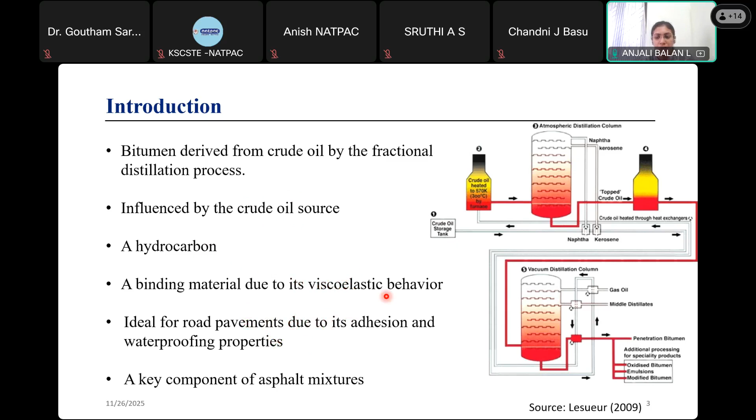And we all know that bitumen is a key component or a major constituent of an asphalt mixture. So now we know that there has been an increase in road construction in India, and India has the second largest road network in the world, right?

So we know that bitumen consumption has widely increased in India. It is said that overall around 8.8 million metric tons has been reached. The bitumen consumption has reached around 8.8 million metric tons, and it is estimated that by 2024-25, it will reach around 10 million metric tons. So there is a huge demand for bitumen. Now we have to think about an alternative material which will replace bitumen in a better way - it should be performing similar to bitumen, or it should be performing better than bitumen. So now we are in that thought process to identify a particular alternative material.

Along with that, we know that there are certain challenges for bitumen, right? Coming to the challenges of bitumen, we know that bitumen is not able to perform better under heavy conditions or heavy traffic conditions, and bitumen emits a high amount of carbon dioxide, right?

The greenhouse gas emissions are higher in the case of bitumen, and since there is an increase in bitumen demand, they are not able to find good quality bitumen. There is also resource depletion and other environmental concerns related to bitumen. So overall, there are certain challenges in using bitumen, basically coming to environmental concerns.

Okay, so we were discussing bio-bitumen now. Why do we require bio-bitumen now? What are the properties of this bio-bitumen? So coming to the properties of bio-bitumen.

If we are using any kind of bio-based material, its properties will be similar to that of petroleum asphalt or a conventional binder. This kind of bio-based material primarily consists of the chemical fractions present in conventional bitumen.

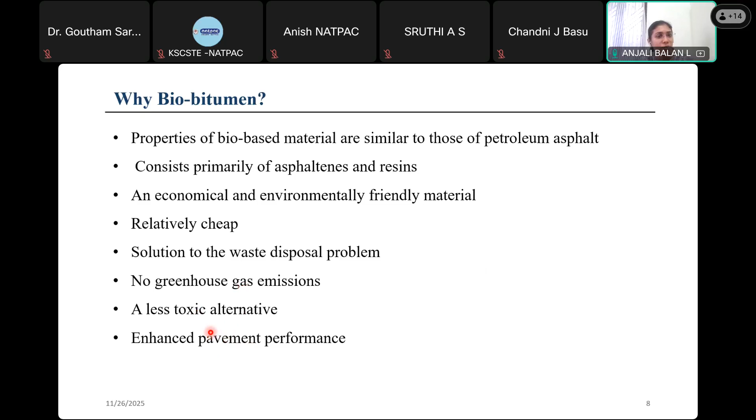Other than these properties, it is a very economical and environmentally friendly material, relatively very cheap, and it can be a solution to the waste disposal problem. We can reduce the emission of greenhouse gases, and all these environmental concerns can be solved. Also, it will be able to improve pavement performance—that is a major highlight of using bio-bitumen.

Coming to the performance of bio-bitumen, various researches have been conducted on it. From those results, we came to understand that it shows better anti-aging property. We know aging is a major issue with pavements; we have short-term aging as well as long-term aging.

With the use of this bio-bitumen, we are able to have an aging resistant material. It has also improved the high and low temperature performance, enhanced the fatigue resistance, and lowered the high temperature stability issue. All these performance aspects were enhanced with the help of bio-bitumen.

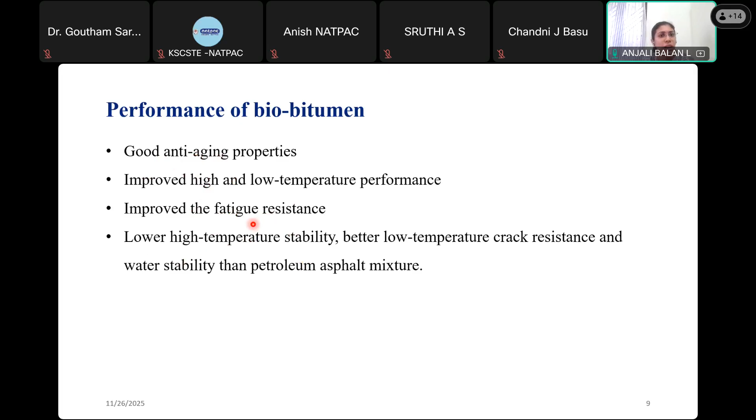For your reference, I'd like to mention that India has recently launched a bio-bitumen project for a Sustainable National Highway—NH 44 in Nagpur. There they used bio-bitumen for pavement construction. The bio-based material used was lignin, which is obtained as a waste product from the paper pulp industry. They used this lignin in bitumen and constructed a 1 kilometer road stretch with bio-bitumen.

So now we understood there is bio-bitumen. So how can this bio-bitumen be obtained?

We have already discussed that bio-bitumen is obtained from a raw material, which is biomass. So what is biomass? Biomass is basically obtained from plants, animals, and certain industrial waste.

We know that bio-waste is a major environmental concern which we are facing now. So depending upon the type of biomass, the properties of this bio-bitumen will vary.

Again, depending upon the type or the process through which we obtain the bio-based material, it will also differ in the performance of that particular bio-based material.

We have discussed the commonly used biomass which have been used for the bio-bitumen. So these are the different biomass sources which have been used for the bio-bitumen.

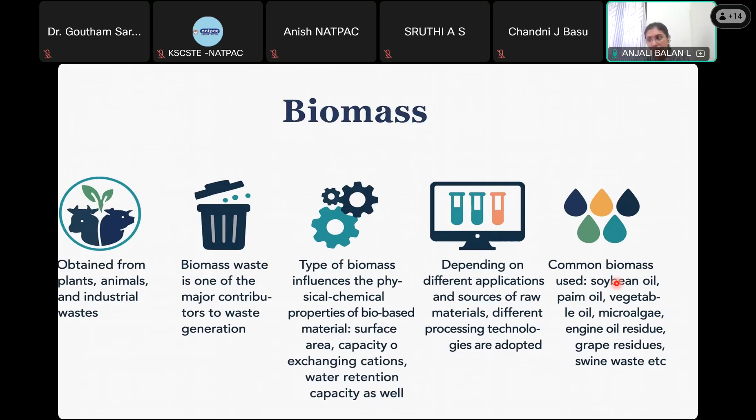Now in this study, we have used the algae biomass. So why have we used the algae biomass? It has a rapid growth rate. That is the one major reason.

Another reason is that it has a high oil content, where this oil content will help the binder to soften it or to reduce the viscosity of the binder, and also it contains proteins and carbohydrates.

Other environmental reasons include that it is a biodegradable material, and it is a very environmentally friendly material.

There is no competition with other types of crops, and it will also help to reduce the carbon footprint. So these are the major reasons for selecting the algae biomass.

Now coming to the production process, we have chosen the algae biomass as a source or raw material, and now we have to get the bio-oil or biochar from it. There are different types of production processes for obtaining this bio-based material, both biochar and bio-oil.

Depending upon the type of application and the source of the materials, the technology or process will be different. Basically the biomass is subjected to a thermochemical conversion process where we use certain heat to transform this biomass.

This transforms the biomass into major products like bio-oil as well as biochar. This thermal conversion process includes processes like combustion, gasification, and pyrolysis.

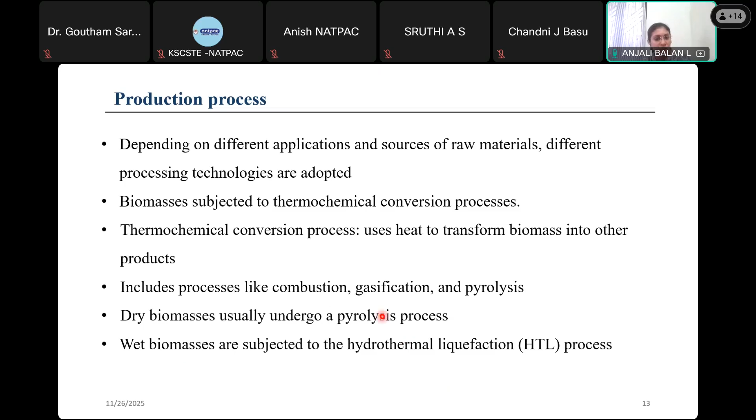If it is a wet biomass, we go for the hydrothermal liquefaction process. So in our study, we have used a pyrolysis process. This is the overall production process where the thermochemical conversion process includes gasification, pyrolysis, and the hydrothermal process.

So within the pyrolysis, we will be getting the biochar as well as the bio-oil, and within the hydrothermal process, we will be able to get the bio-oil. So this is the overall production process for the biomass.

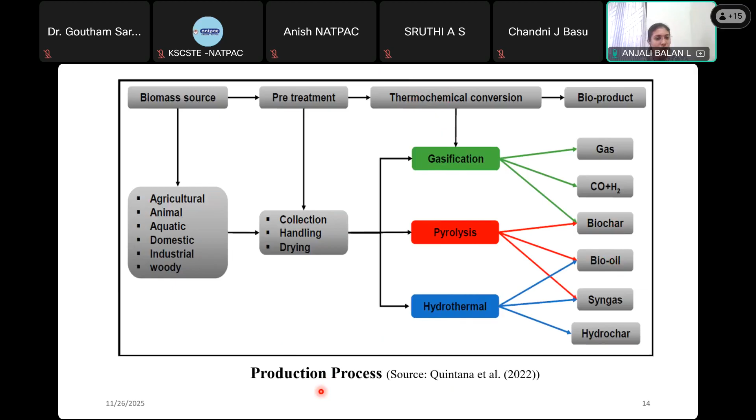Now coming to pyrolysis, as you all know, what is pyrolysis? It will convert the biomass to bio-oil, biochar, and non-condensable gases. It is done under the absence of oxygen at a higher temperature, which is between 450 to 550 degrees Celsius.

Using the pyrolysis process, we will be able to get a high bio-oil content. That is a major advantage with pyrolysis. Again, pyrolysis can be divided into slow pyrolysis, fast pyrolysis, and flash pyrolysis.

Coming to slow pyrolysis, here we have a slow heating rate as well as a long residence time, where we will be subjecting this biomass for a certain period of time.

In slow pyrolysis, we have a long residence time, and the amount of product which we get from the slow pyrolysis will be less than 50% of the weight of the initial biomass.

But in the case of fast pyrolysis, we will be having a high heating rate, and it will be a short residence time. The amount of product which we get from here will be higher when compared to slow pyrolysis.

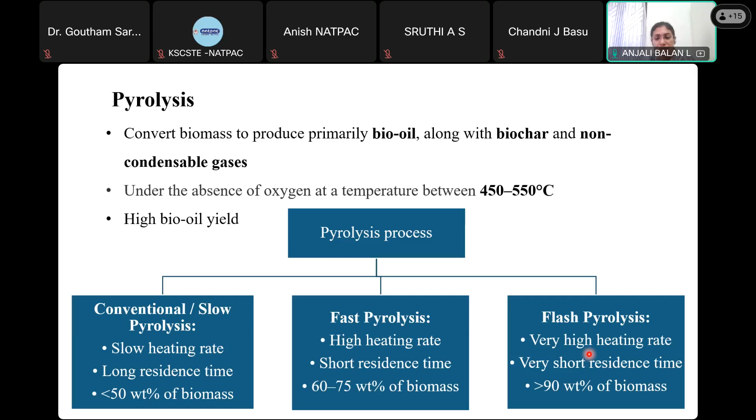Now coming to flash pyrolysis, where the heating rate will be very high compared to fast pyrolysis, and it will be having a very short residence time. The bio product which we will be getting will be greater than 90% of the initial biomass.

So coming to the pyrolysis process, how we have done the pyrolysis is: first we have the biomass, whatever the biomass source is. First we will dry it, to be less than 10% moisture, and we will be grinding it into smaller particle size.

Once that is done, we will heat it between 450 to 550 degrees Celsius, and we will get the biochar from heat. Along with that, hot pyrolysis vapors will be formed, and these will be condensed so that we get the bio-oil from there.

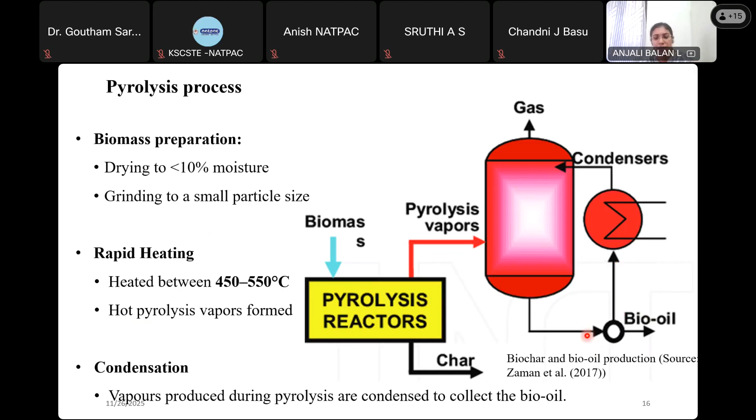So from the fast pyrolysis or pyrolysis process, we get the bio-oil as well as the biochar. So at what conditions, or what amount of biochar will we be getting? From pyrolysis, we get around 15 to 25% biochar.

And from this, we will be getting around 10 to 20% biogas, and 50 to 75% bio-oil will be obtained using the pyrolysis process.

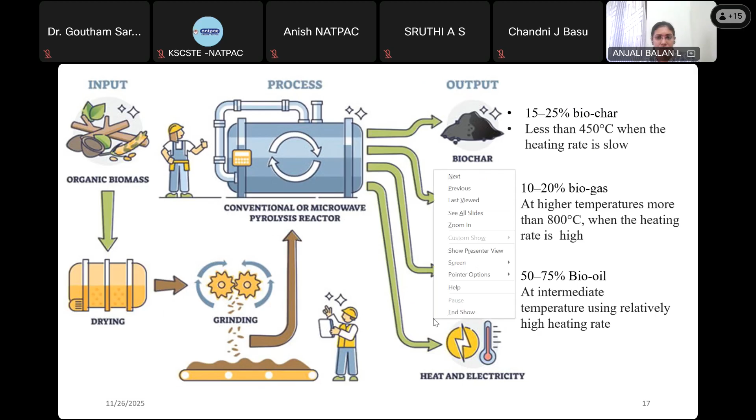So now coming to the biochar, which is a major product from the pyrolysis process.

It is a stable and rich carbon material, and it basically consists of nitrogen, hydrogen, inorganic elements, and some traces of heavy metals. It is also a porous material with a large surface area.

These are the properties of biochar, and it is highly resistant to biological and chemical deterioration. The chemical composition of biochar depends on the process adopted.

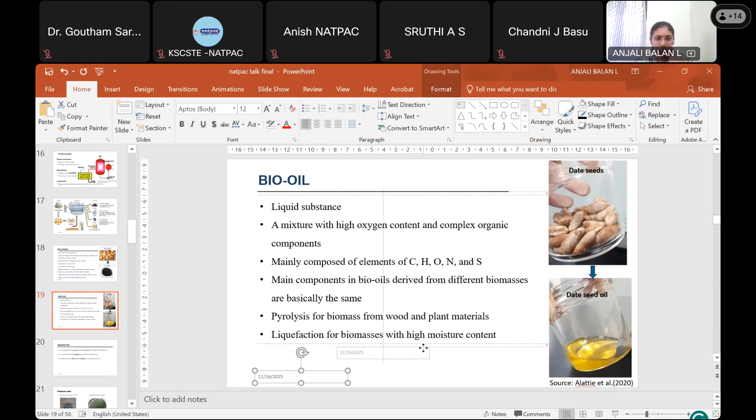So now coming to the bio-oil, which is a liquid substance obtained from the pyrolysis process. It is a mixture with a high oxygen content, and some organic compounds are present in it. It basically consists of carbon, hydrogen, oxygen, nitrogen, and sulfur.

So the major components, if the bio-oil is derived from different biomasses, are found to be almost the same. There is not much difference between the components in the bio-oil. That's what the research says.

So basically, we go for pyrolysis for biomass from wood and plant materials. If the biomass source is wood and plant materials, we go for pyrolysis. If it is biomass with high moisture content, we go for the hydrothermal liquefaction process.

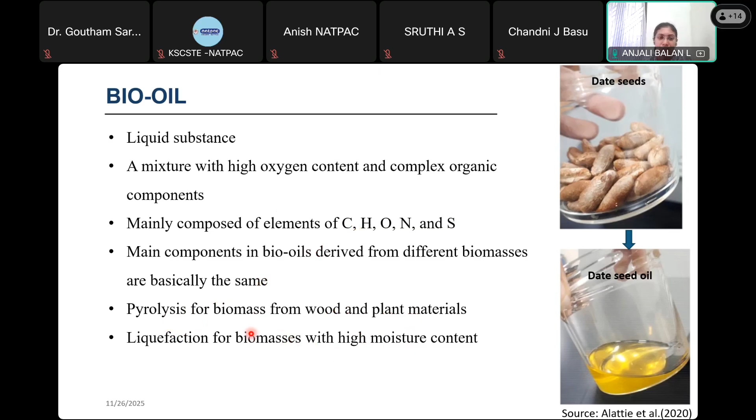So the materials which we used in our study were VG30 and spirulina species algae. In our study, we used algae biomass. Within algae, there are different types of species available, and within the different species, we selected the spirulina species algae.

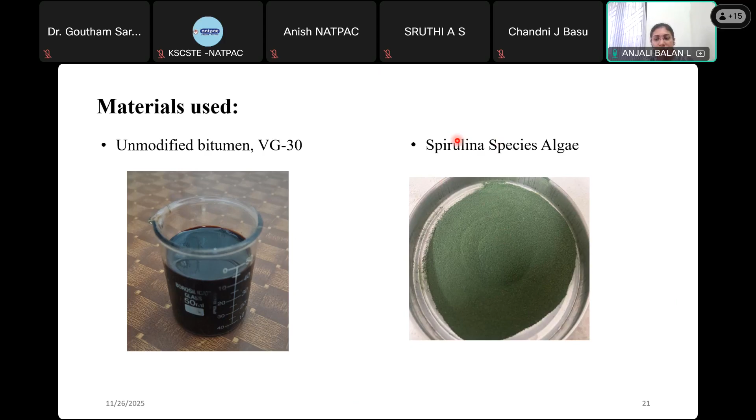So why did we select the spirulina algae species? The major reason is the oil derived from spirulina is rich in fatty acids.

As well as phenolic compounds, and it is antioxidant. The rheological properties of spirulina algae oil were found to be similar to that of bitumen.

Another major reason is it is easily available within the Indian region. It is a very renewable material as well as cost efficient.

And the performance of spirulina was found to enhance the properties of the bitumen. Another major reason for selecting spirulina is it has a lipid content of around 35%. As the lipid content is more, it will be able to enhance the properties of the binder.

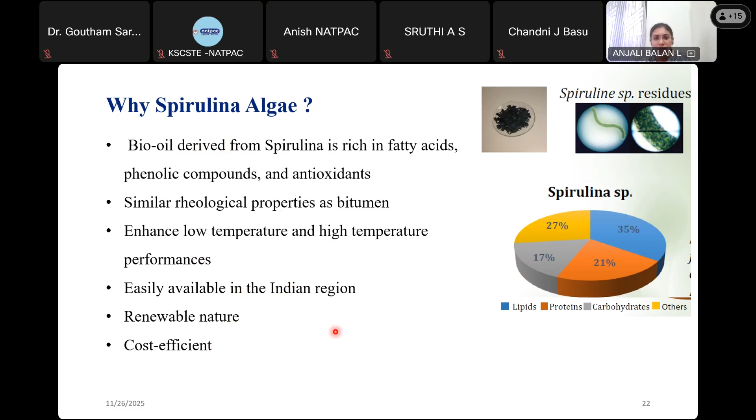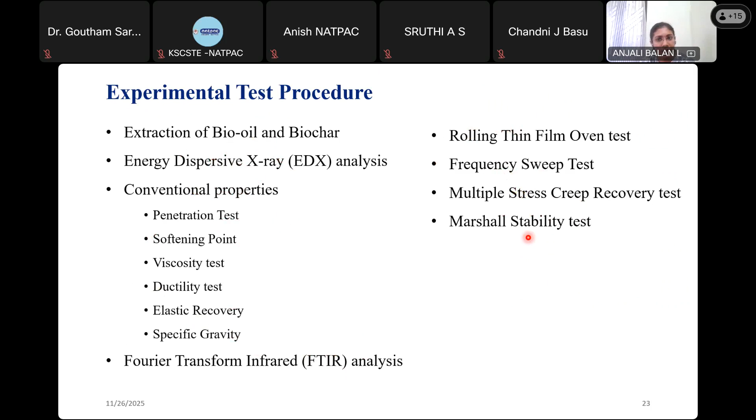So this is the overall methodology of our study: the initial materials which we took were VG30 and the spirulina algae species, followed by the preparation of bio-oil and biochar. From there, we modified the bitumen using the bio-oil and biochar.

Then we did the experimental investigation for unaged as well as RTFO conditions. For the unaged samples, we did the EDX and FTIR, and for conventional properties, again for RTFO as well as unaged conditions, we did the rheological testing as well as FTIR analysis.

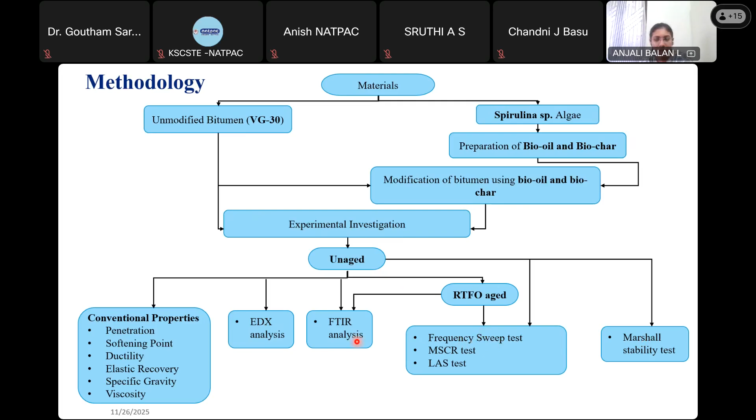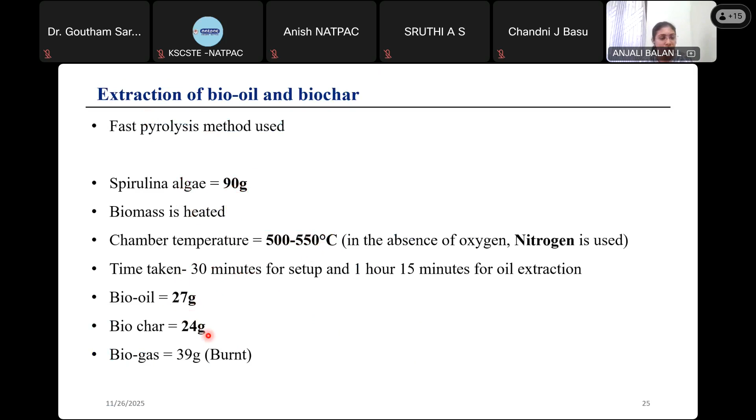So now coming to the extraction of bio oil and biochar, we have used the fast pyrolysis method. In that, around 90 grams of spirulina algae was taken and the temperature was around 500 to 550 degrees Celsius. The complete setup took around 30 minutes and around 1 hour 15 minutes was taken for the oil extraction. The amount of bio oil we received is 27 grams, biochar 24, and biogas around 39 grams.

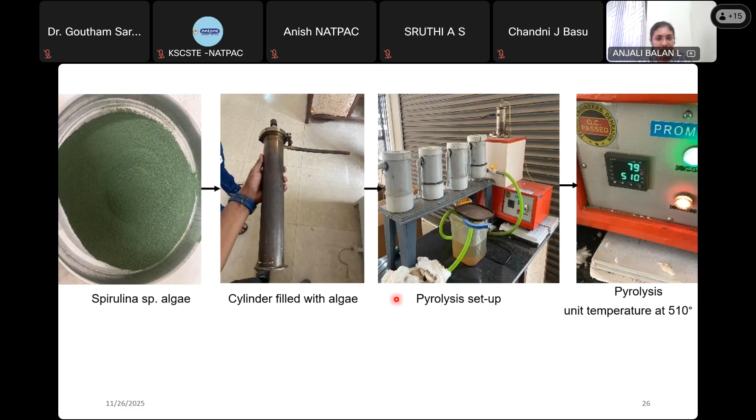So this was the overall process. We had the spirulina algae, and here it was a cylinder which we filled with the algae, and this is the overall pyrolysis setup. And this is the pyrolysis unit which we set at around 510 degrees Celsius.

So this is the final product or the bio-based material we obtained, which is bio oil as well as biochar. The bio oil was dark green in color. It was a thick viscous material, the specific gravity was found around 0.95, and the boiling point was around 180 degrees Celsius. This was the biochar we obtained. It was ash in color and found in pebble-like sizes.

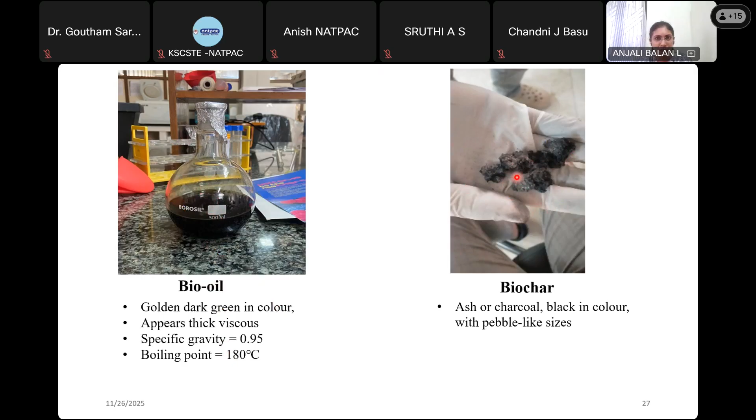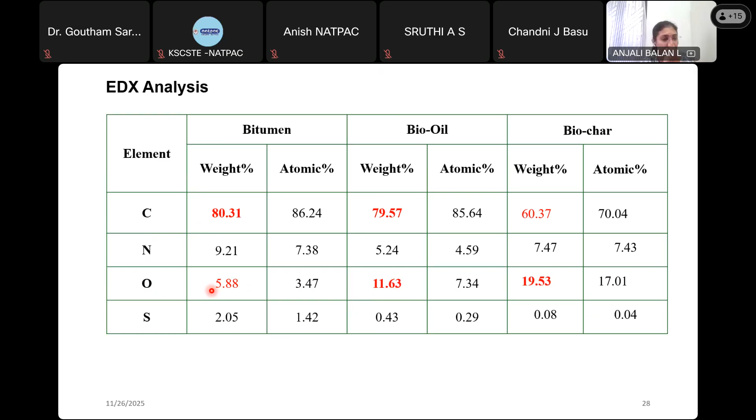So now we have done the EDX analysis, which is done to determine the elemental composition of a material. We have the bitumen, bio oil as well as the biochar. Here we can see that the carbon in the bio oil was found to be higher than that of the biochar, and almost similar to that of bitumen. The nitrogen was also in the same range, and the oxygen was found to be higher in the biochar and also higher in the bio oil compared to the bitumen. So this is all about the EDX analysis.

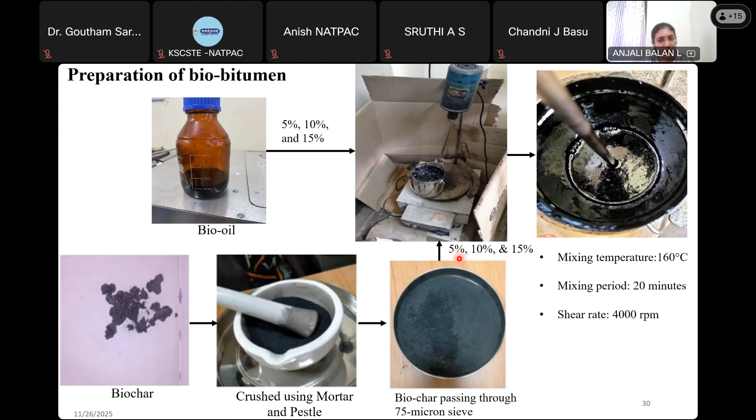Now coming to the preparation of the bio-bitumen. Here you have a bio-oil and here a biochar. The bio-bitumen is prepared using a high shear mixer at 160 degrees Celsius, a 20-minute shearing period, and 4000 RPM. Similarly with the biochar, first we crush it using a mortar and pestle and then add it to the bitumen at dosages of 5%, 10% and 15%. And now you get a bio-bitumen.

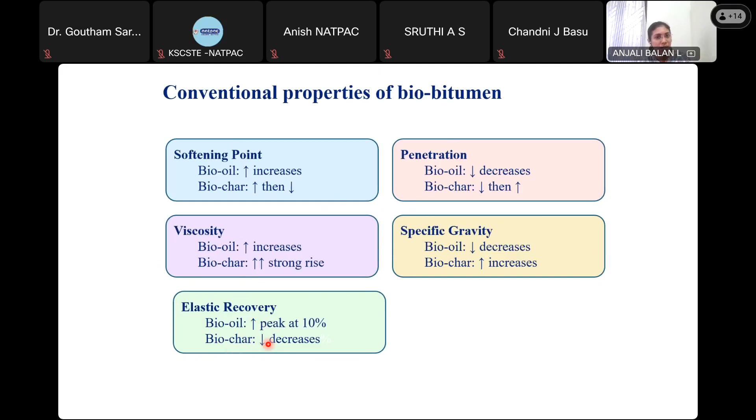The addition of bio-oil increased the viscosity, and the biochar also increased the viscosity. The specific gravity decreased with the bio-oil and increased with the biochar. The bio-oil improved the elastic recovery of the material, while the biochar decreased it. So these were the conventional properties. As you can see here, the softening point increased with the bio-oil and also with the biochar.

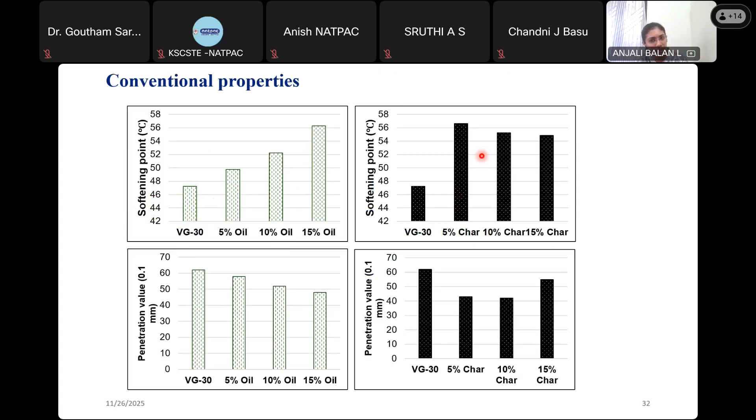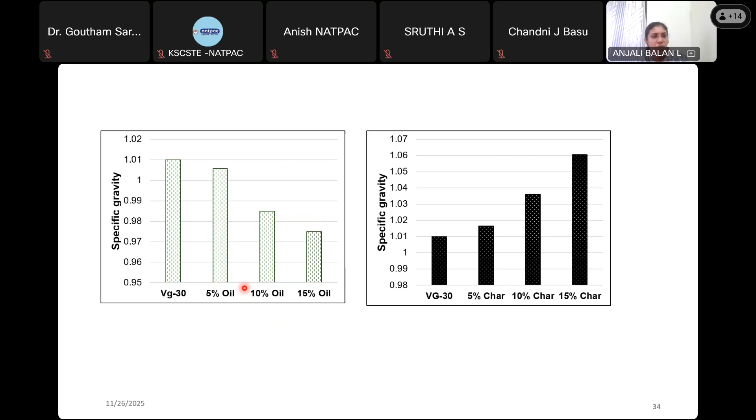In the case of penetration, it has decreased with the bio-oil as well as the biochar, and elastic recovery has decreased. These were the results which we have discussed. So overall, we can understand that with the conventional properties, it has given a stiffening effect to the binder. So now we have done certain studies to understand the aging of this bio-bitumen.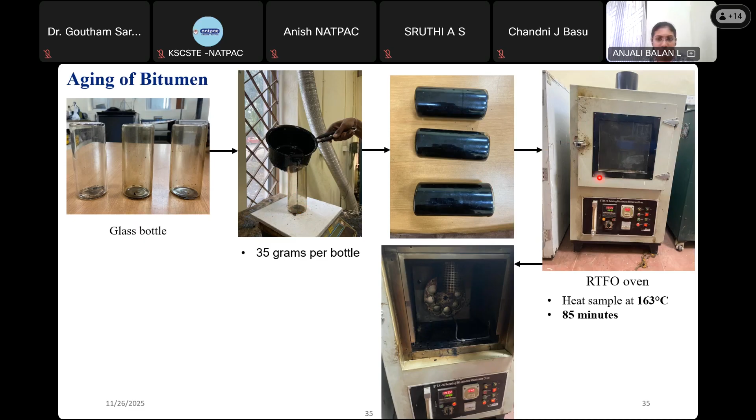For the aging, we have certain glass bottles and we have done the RTFO aging, basically the short-term aging. Around 35 grams of bitumen was poured into each glass bottle, then we rotated it and kept the sample at 163 degrees Celsius in an RTFO oven for a period of 85 minutes. Once it is done, it is subjected to short-term aging. After that we have done the rheological investigation.

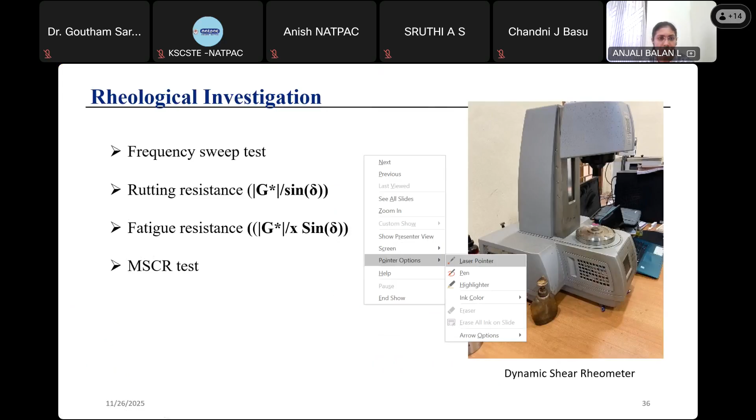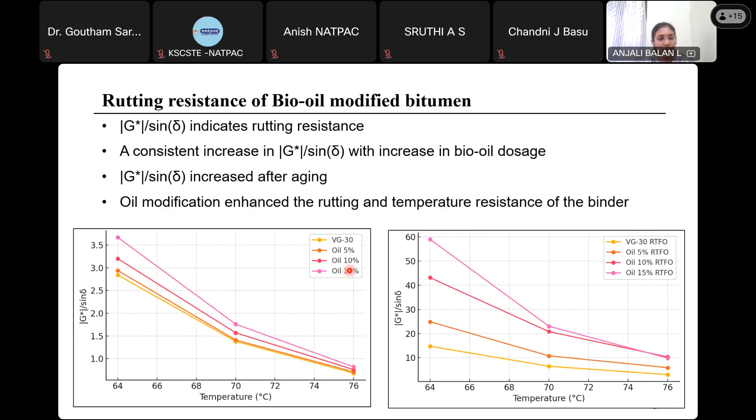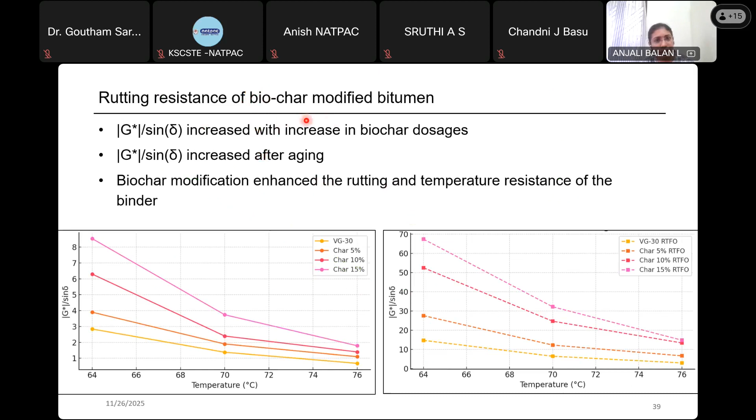So overall, with the addition of biochar as well as the bio-oil, the rutting resistance has improved up to the dosage we have taken. The rutting resistance as well as the temperature resistance of this binder has improved with the biochar as well as the bio-oil modification. Now coming to the MSCR, that is the multiple stress creep recovery test. It is used to evaluate the rutting performance of the binder itself. From the MSCR test we get two parameters: non-recoverable creep compliance and percent recovery.

It indicates that the particular bio oil modified binder is providing a rutting resistant property due to the stiffening effect of the binder. Okay, so now coming to the percent recovery.

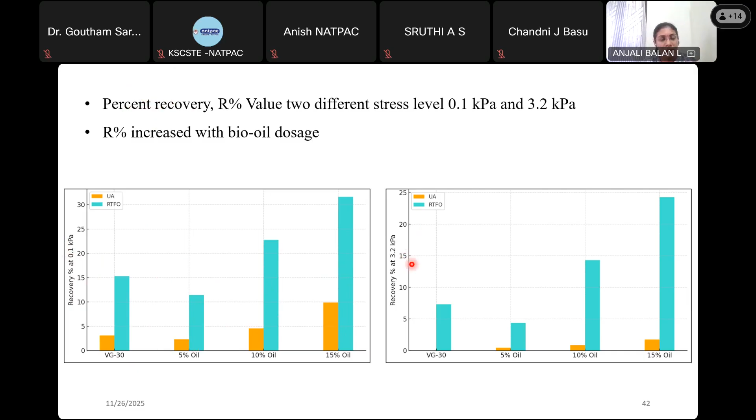So this increase in recovery percentage says that the material is able to recover to some extent. The R percentage is getting increased at the lower stress level as well as at the higher stress level. That was the case of the bio oil dosage.

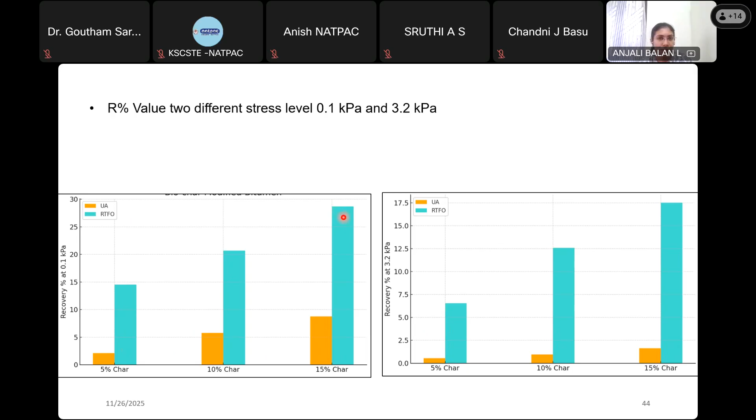Similarly, the recovery percentage in the case of the biochar modified binder was found to be increased with the different dosages, that is 5%, 10%, and 15%, as the rutting resistance is improved, which means that the deformation is getting recovered.

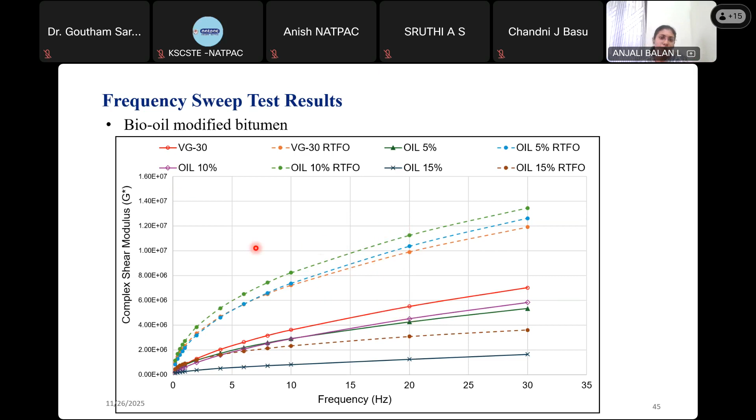That's what I feel. Here we can see that the complex modulus of the VG30 is found to be higher than that of the bio oil modified binders. With RTFO, it is obviously more than that of the unaged binder. Once the binder is aged, the stiffness of the binder will be more, so the complex shear modulus will be more. So with the bio oil modified binder, we cannot completely trust this particular result.

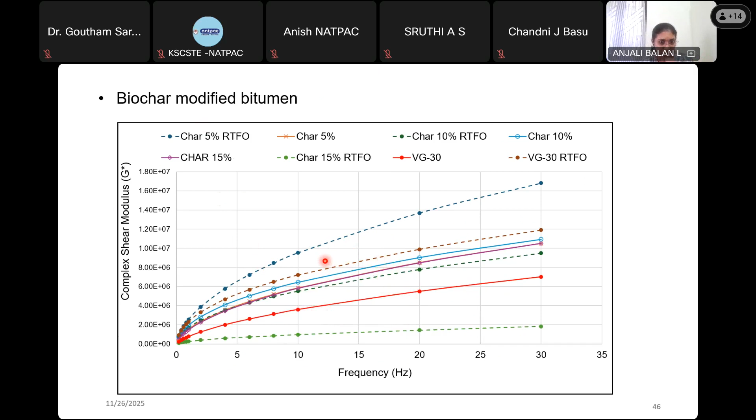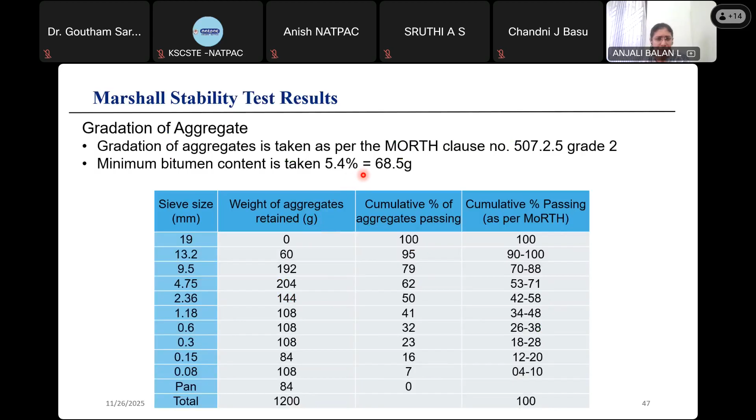Now coming to the Marshall stability test, we have done the mix design for the BC grade 2. This is the gradation of the aggregate. Coming to the test results of the Marshall, with the different dosages of the oil, the Marshall stability was found to be higher at the 10% dosage in the case of bio oil.

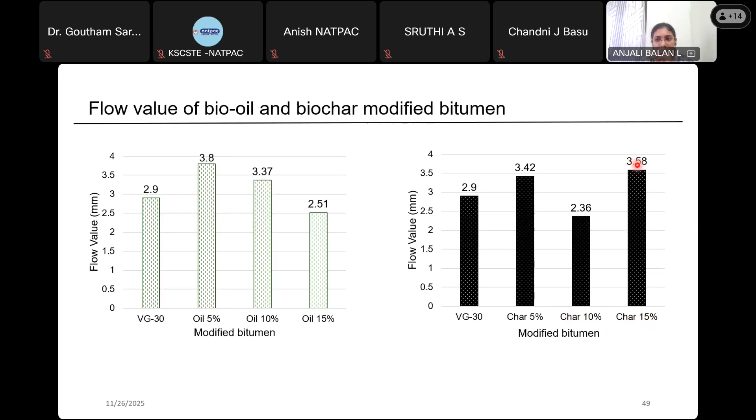Similarly, in the case of flow value, you can see that at 5% the flow value was around 3.8. In the case of the biochar modified binder, it was coming around 3.58 at the higher dosage, that is around 15% biochar. So these were the values which we got for the Marshall stability test.

So in this particular presentation, there are certain results which are not there. I'm really sorry for that.

Now I would like to conclude my presentation with these statements: the bio oil as well as the biochar have shown good compatibility with the bitumen. If we take the case of elemental composition, the elements present in the bitumen were almost similar to that of the bio oil as well as the biochar. With the testing of conventional properties, it has given an idea that the stiffness of the binder was found to increase with increase in dosage. Even with the bio oil also, it was found to be increasing the stiffness of the binder.

As we have seen earlier, the superpave rutting parameter, that is G star by sin delta, has shown improvement in the rutting resistance. Similarly, the rutting resistance of the biochar modified as well as the bio oil modified binder has shown an improvement. So overall, the addition of this biochar as well as the bio oil has shown a positive effect on the pavement. But since we haven't conducted all sorts of experiments based on the algae, we cannot completely say it has shown a positive effect on an overall basis. But to some extent, whatever experiments we have done, we can say it has shown some positive effect on pavement performance.

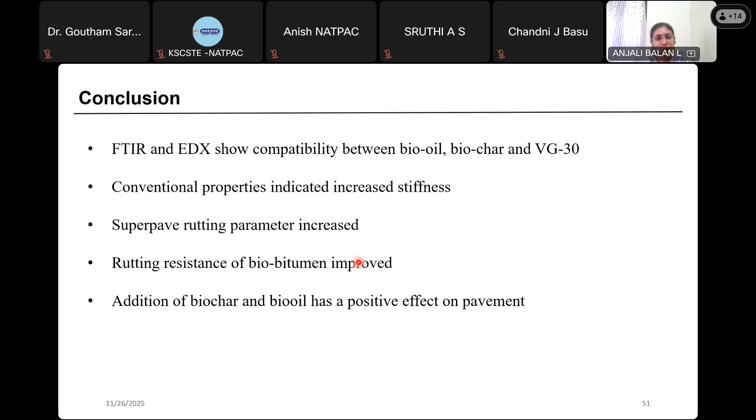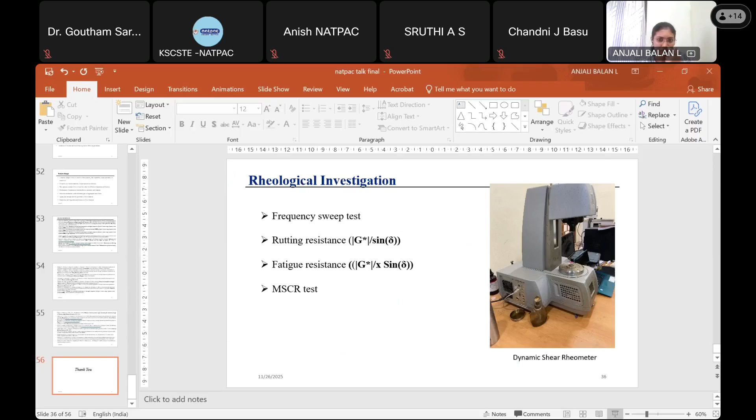That was a nice presentation. Thank you, ma'am. Now the forum is open for discussion.

Yeah, Anjali, this is Dr. Goutham. That is a nice presentation. Thank you, sir. So I had a few questions actually.

One is, have you checked the moisture resistance of the mixtures, or do you think there will be any effect on that? So actually, I have seen certain studies on these lines. Before going for this bio oil as well as biochar production, we have completely dried the material, and later on only we have obtained this bio oil as well as biochar. But still, I believe that since there is moisture content present, some sort of moisture damage may happen, which can be studied in later stages.

And you also mentioned there can be an issue with storage stability - is there a possibility of any segregation happening? Yes, what I understood is if the size of this biomass which we are taking is a bit larger, or if the content is more, there can be a chance of agglomeration, or some kind of homogeneity can be lost. So some sort of segregation may happen at that time.